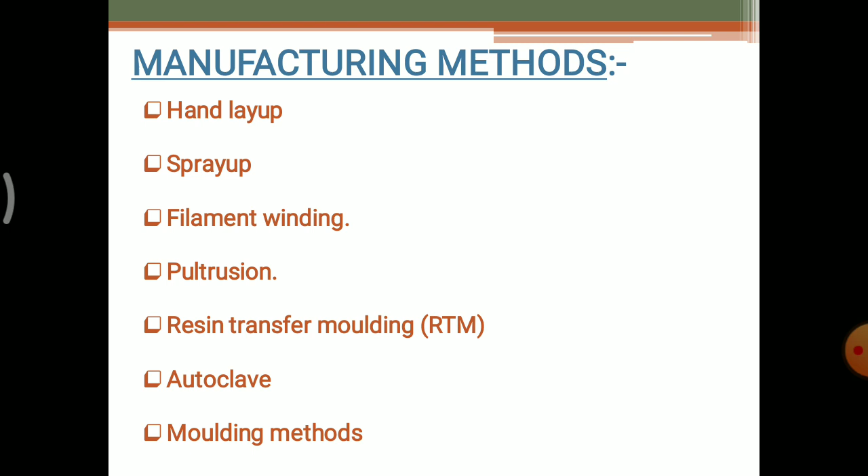The first method in the manufacturing of composites is hand layup. This method is one of the best examples of the open molding process. There are two types of molding process: open molding and closed molding. In open molding, we can see all the interior parts of the mold, and there is only one mold. But in the closed mold, you cannot see the interior shape of the mold.

Going to the process of hand layup, a gel coat, seen in orange color in the picture, is applied to the open mold. The open mold is pictured here as a V shape, similar to a U shape. The gel coat is applied on the open mold as a thin layer. The reinforcements used are fiberglass reinforcements, which are dry in nature. The fiberglass is crushed like a powder type material and used as the dry reinforcement here.

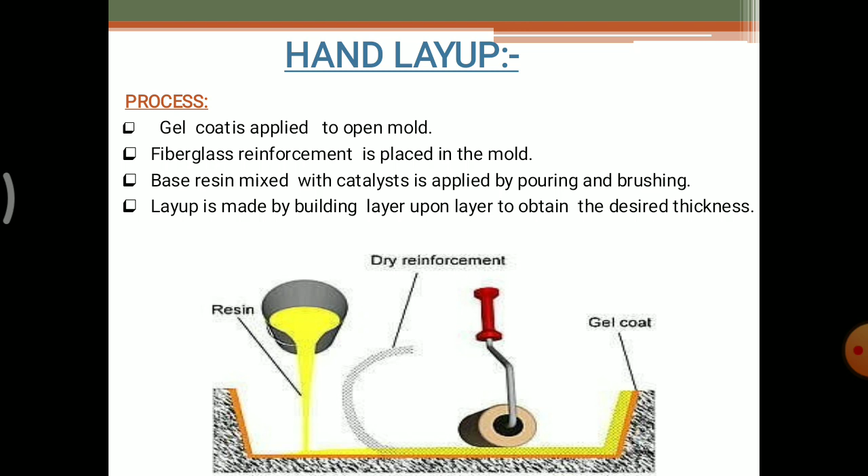This layup is made by building layer upon layer to obtain the desired thickness. Say we want a 5 mm thickness. We pour the resin, add dry reinforcement with catalysts, and push the roller front and back over the resin layer. When we have obtained the 5 mm thickness, we stop rolling on the resin surface. This is the basic process of the hand layup method, and this is a sample picture of the hand layup process used in the open mold.

So what is the process of hand layup? The name itself comes from the method: the roller is used by manual handling, so this process is known as the hand layup process. The most popular type of open molding is the hand layup process.

So we all know the difference between the open mold and closed mold. The best example for the open mold is the hand layup process. The hand layup process is a manual, slow and labor-consuming method. We are using manpower in this type of process, so there is no skilled labor.

We are only using basic labor, that is, without knowledge of the process a laborer can do the process, and the process is a little bit slow compared to other processes, and it is completely done by manual setup only.

Next, the mold is coated with a release anti-adhesive agent. So what is meant by a release anti-adhesive agent? On top of the mold we apply the gel coating first. This gel coating is the anti-adhesive agent. When we have done our work on the mold, we take the mold from the produced part. If any part sticks to the mold, the complete product can be disturbed and come out defective, and it is damaged.

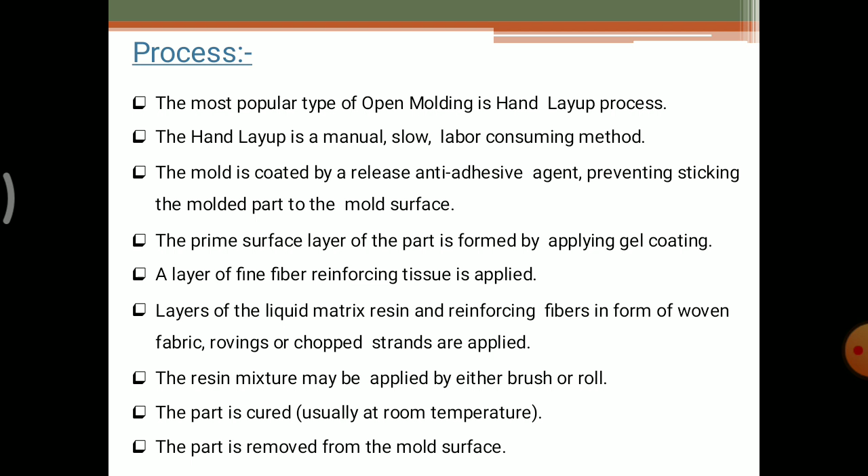Next is the low tooling cost. No extra tools are used here; only the roller and the mold are used in the process, so the tooling cost is low. Next is custom shape: you can define your own shapes and make them, that is the custom shape.

Next, large and complex items can be produced. Any type of product can be produced, larger as well as complex. Complex means a tough type of design, having more arcs and complex features. These can also be produced in the hand layup process. So these are the advantages.

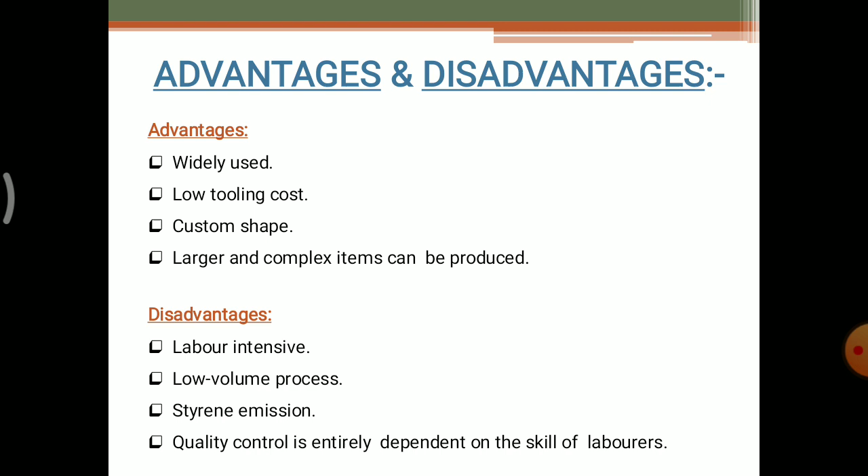Next one is the products, different types of applications used in day-to-day life. So first one is the top floor of different types of industries, to stop the sunlight as well as other climatic conditions, but there is some amount of light there, as you can see in the first picture. So the top of the roof is made entirely by the hand layup process with different specifications. The second one is the type of refrigerator, that is of plastic type or fiber type. So you can use both. So there you can see the different types of cupboards.

Next, third one is the window glass. So different types of window glasses are there in the market. So by this process the window glasses can also be produced. So changing the reinforcement can change the type of glasses. So we are using the fiberglass. By changing the materials also we can make different types of glasses.

And last, fourth one is the dome. So dome type structure which we use in different models. So the latest edition of this is the dome model, which you can see in the fourth picture. So the different design has been pictured in this upper part of the dome. So these are the different types of hand layup products which we are using in day-to-day structures.

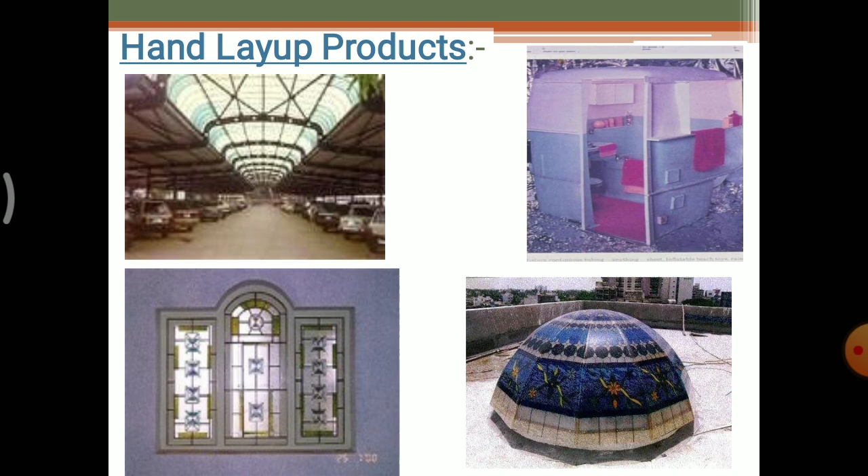Next one, the second method is the spray up method. So this spray up method is the extended part of the hand layup method. So by using extra tools and other different reinforcements, you can develop this type of method, that is the spray up method. So first of all, a liquid resin matrix and the chopped reinforced fibers are sprayed by two separate sprays onto the mold surface. So the resin matrix and the chopped fibers are mixed in the mixing chamber, which you can see in the left hand of the man in the picture there.

Then first of all we have to chop the fibers into 1 to 2 inches length, that is 25 to 50 mm length. Then it is sprayed by air jet simultaneously at a ratio between the reinforcing and matrix phase. So we have already discussed in the previous lectures that two types of phases exist in the different types of manufacturing methods. First one is the reinforcement phase and second one is the matrix phase. So matrix phase is the basic DNA phase, that is the basic structure of the metal or material. Next one is the reinforcement phase. So in the reinforcement phase we have to add the minor ingredients to the major ingredient, that is the major part of the metal or material.

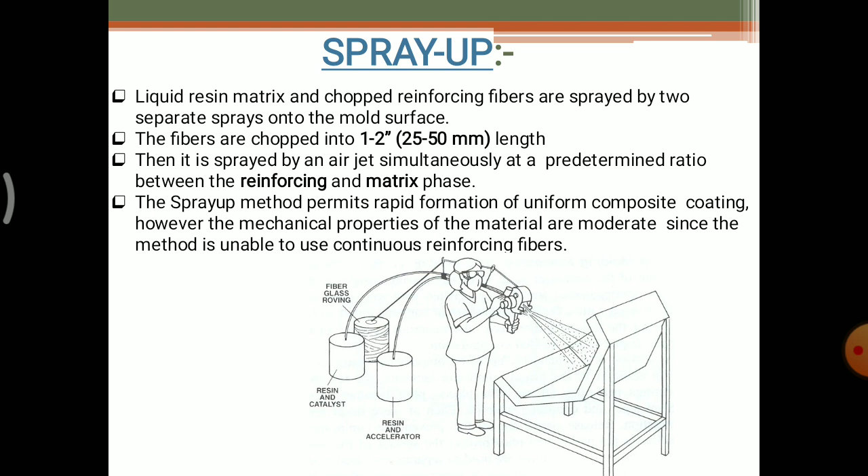And last one is the resin and accelerator. So an accelerator is used to increase the speed, that is the speed of loading the resin on the resin gun. So that is the resin and accelerator.

In the spray up process, chopped fibers and resins are sprayed simultaneously into the mold. A spraying gun supplies resins in two converging streams. The first one is the resin and the second one is the reinforcement, that is the fiber. Chopped fibers are used, into which roving is chopped. So rovings are used.

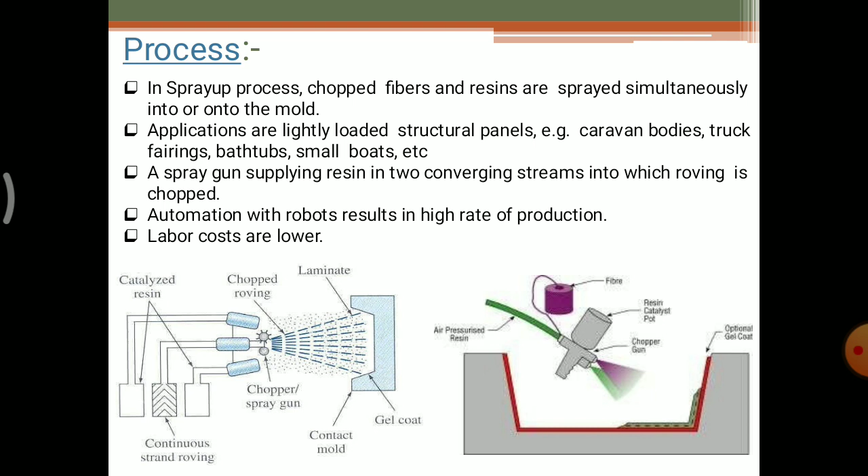First of all, a gel coating has to be applied on the open mold, then the spraying is done on the surface. So these are the basic process of the spray up process.

Next, in both cases, the deposit layers are densified with rollers. So when we are spraying or using hand layup, we are using these deposit layers which are densified. There we can use two types of resins.

First, catalyst and accelerators are used. A catalyst is a substance which is added to the gel coat or resin to initiate the curing process.

Next is the accelerator, a compound which is added to speed up the action of the catalyst in a resin mix. When mixing with resin, it speeds up the action. This curing is done at room temperature or at a moderately high temperature in an oven.

Both methods have been used - at room temperature or in a moderately high temperature oven. So you can see the spray up process in the picture below.

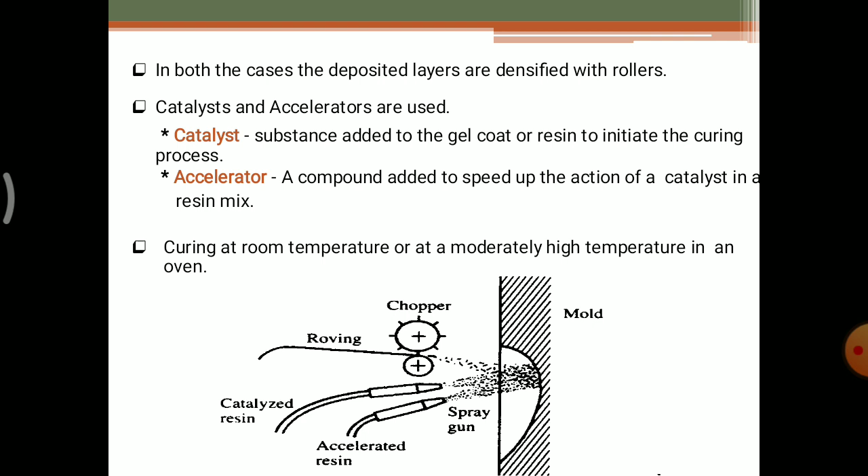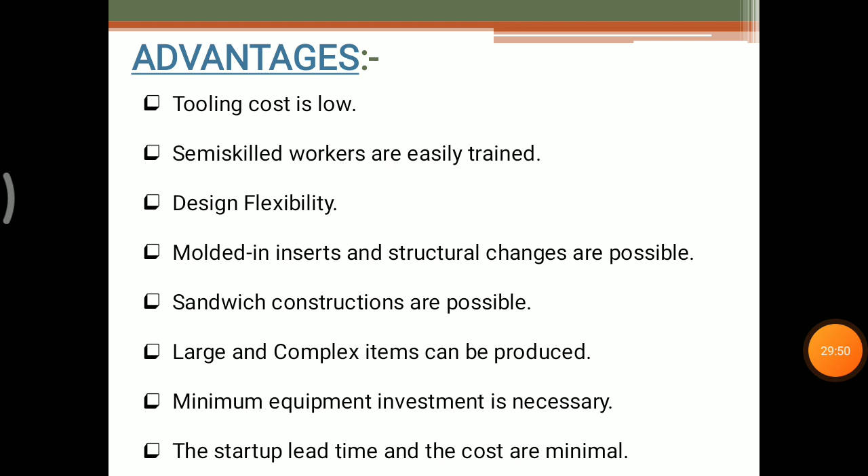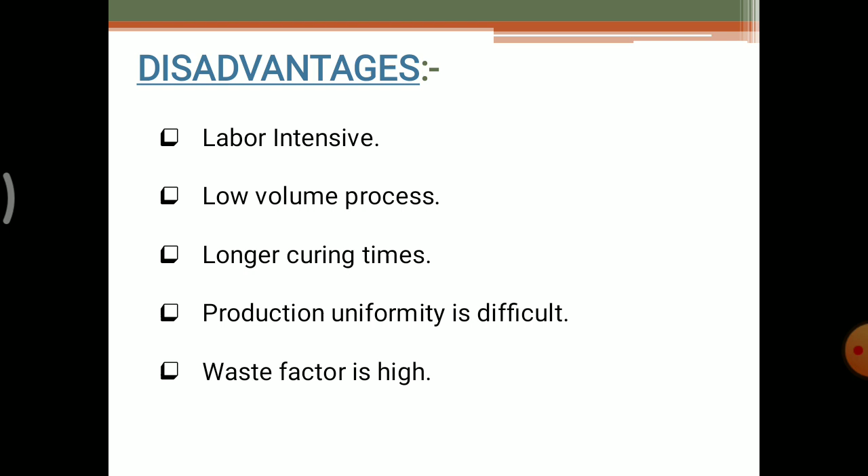These are the disadvantages of the spray layup method. Thank you.